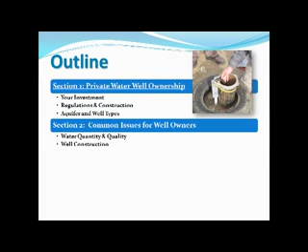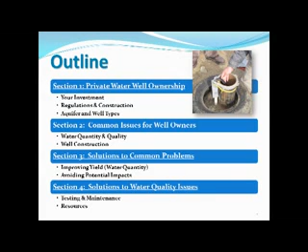In Section 2, I'll talk about common issues regarding the quantity and quality that your water well produces, and well construction problems. In Section 3, how to improve the yield or quantity of water produced from your well, potential sources of contamination around your home that can get into your well, and how to protect your well from them. Finally, in Section 4, we'll discuss the importance of testing and maintaining your water well. I'll give you a list of resources that will help you resolve problems you may encounter with your well.

First, let's look at some interesting statistics. 95% of rural Americans get their drinking water from a groundwater source. 42 million of you depend on water wells for your water. A water well system is clearly a major investment in your property. I hear that for some, the cost spent on the water well system, maintenance, and repairs has exceeded the cost of their original lot purchase.

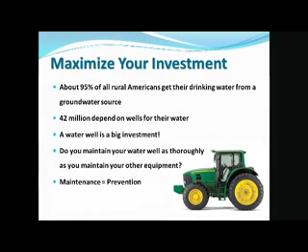All of us understand the importance of maintaining major pieces of equipment you own. For example, your car, or this nice new John Deere tractor shown here. How many of you would run this year after year without ever changing or even checking the oil? It would clearly reduce its usable life. So like changing your oil, inflating your tires, routine testing and maintenance can keep your water well operating smoothly, ensure your water is safe to drink, and extend the life of your water well.

As with most types of construction, permits, rules, and regulations apply. The Colorado Division of Water Resources is the lead state organization that oversees private domestic water well permitting and construction. Within this organization is the State Engineer's Office and the Board of Examiners of Water Well Construction and Pump Installation Contractors. By law, every new well in the state that diverts groundwater must have a well permit.

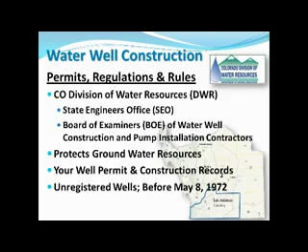If your well was put into service before May 8th of 1972, it may not be registered. You are not required to, but you can call the DWR and they will inspect and register it at no charge to you. This will be required if you need to redrill it or sell your property.

Before we can understand the differences in water wells, we need to understand where the water is coming from. An aquifer is defined as the water-bearing sediment or rock that your well is drilled into. There are 2 basic types, alluvial and bedrock. As you can see by the house near the creek, alluvial wells are drilled in the shallower river and stream valley sands and gravels or other loose sediments that are saturated with water.

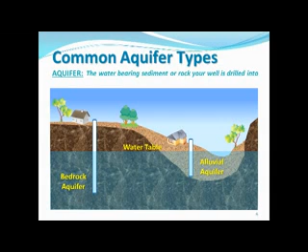Where there is not enough sediment cover of this type, water wells are generally drilled into the deeper bedrock aquifers that consist of hard sandstones, siltstones, or shales, or as we find in western parts of Las Animas County, coal beds. The water in these formations is found in the more porous rocks such as a sandstone or within naturally occurring fractures within the rock.

In an alluvial well, your groundwater is found in saturated sands and gravels. The water table is the top of where that groundwater exists and is the minimum depth you need to drill to produce water from your well. You can see this as the blue shaded area on the slide. The water table fluctuates, so you'll need to drill below the top of the water table to get adequate water from your well.

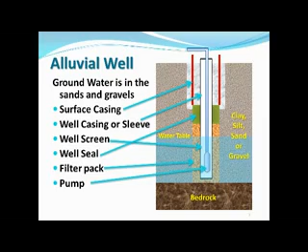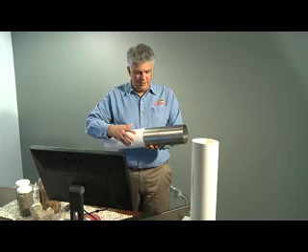Here are some typical well screens. This one's a stainless steel screen and this one's made from PVC, and I have them threaded together just for the demonstration here. You can see the very fine, thin openings between these slots here. This allows the water to flow into your well and it keeps rocks and coarser sediment from getting into your well pump and your well system.

This is a jar filled with bentonite clay. I put water in here so the clay would hydrate. This is used as the seal in your well. This is a typical sand that's used for a filter pack. You can see it's a fairly coarse sand, so what it will do is filter out finer sediments before it gets to your well screen.

So how is a bedrock well different from an alluvial well? In areas where there is not thick enough sediment layer, water wells are drilled into the harder bedrock formations. In this harder rock, the water is found in either natural fractures within the bedrock or the more porous layers in the bedrock such as sandstones.

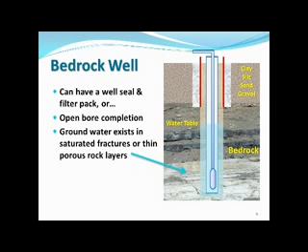Here I am showing an actual photo of exposed bedrock along Highway 12 west of Trinidad. Here you can see the light-colored and fractured sandstones, black coal bed layers above the sandstone, and the loose material is shale or claystone that is weathering away. The well can be constructed similar to the alluvial well in the previous slide with a sand or gravel filter pack, or instead it can be constructed in an open borehole as shown here. In the next section, I will present the common issues private water well owners encounter.